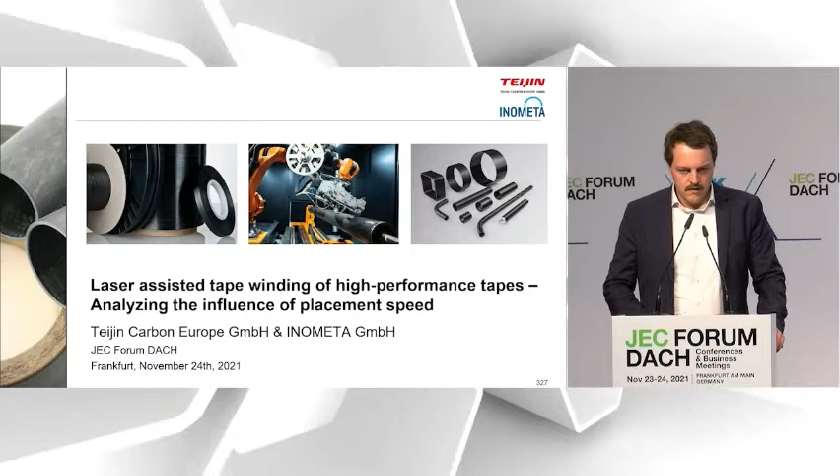We will first start with a quick company profile. I will start with the Teijin introduction, and Markus will take over with the introduction of Inometa. He will then move on with some motivation and partnership behind what we're doing, and describe the systematic approach we're following. I will then start over and show you some first results from our trials, give you some insights into what we evaluated, what we see, how we move on, and what's furthermore planned.

Teijin Carbon Europe is part of Teijin Limited, a Japanese group, globally over 170 companies with more than 21,000 employees worldwide. I'm based in the German facility of Teijin Carbon Europe in Wuppertal. We also have our production plant in Heinsberg near the Dutch border, and we are one of the largest carbon fiber producers worldwide and the largest short fiber producer.

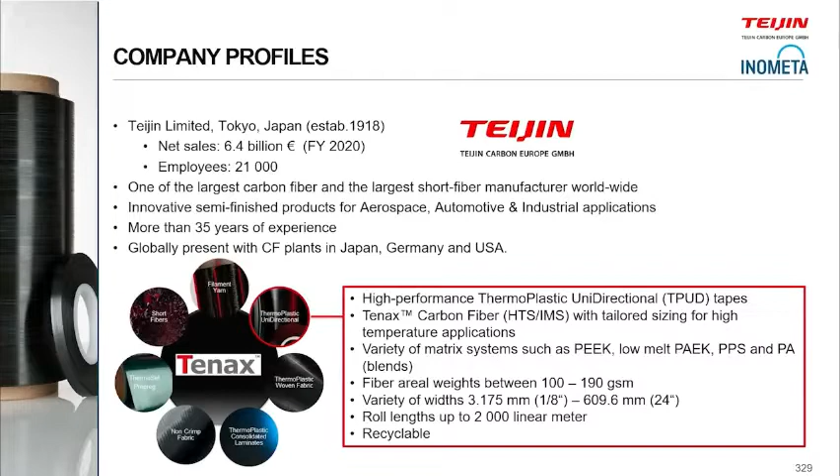On top of just carbon fiber production, we also have various semi-finished products in our portfolio for demanding aerospace, automotive, or industrial applications, such as NCF materials, thermoset prepregs, rapid cure systems, or thermoset prepregs based on rapid cure systems, but also our thermoplastic materials that are part of our evaluation.

What we call in Teijin language a TPUD, a thermoplastic unidirectional tape. In the portfolio we have several types based on high-performance thermoplastic materials: PEEK-based, Low-Melt PAEK, PPS, and also from the Japanese side some polyamide tapes.

The first three that were mentioned are part of our evaluation process. With our newest production line running since 2019, we are able to produce 24-inch wide tapes, but also the former standard with 12-inch, and everything down to slitted tapes is currently handled by external partners.

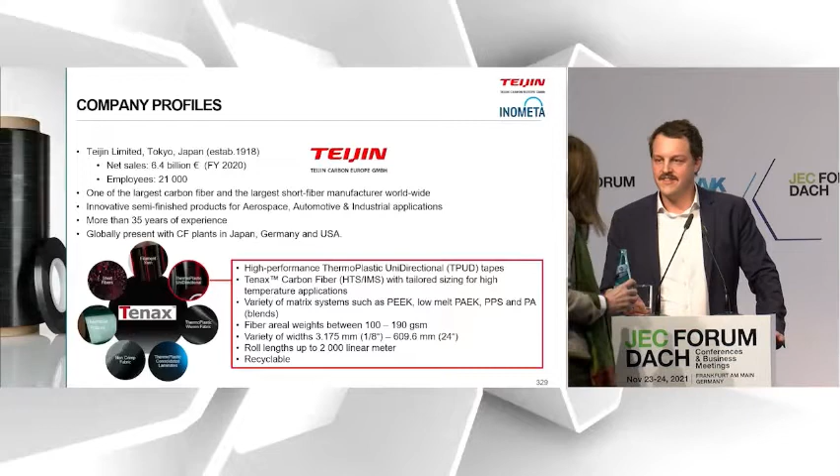The portfolio ranges fiber areal weights from 100 to 190 GSM. With the new production line, we're able to produce up to 2,000 meters, which can be sent directly to slitters, long defect-free raw materials that help automated processes as they are used within Inometa.

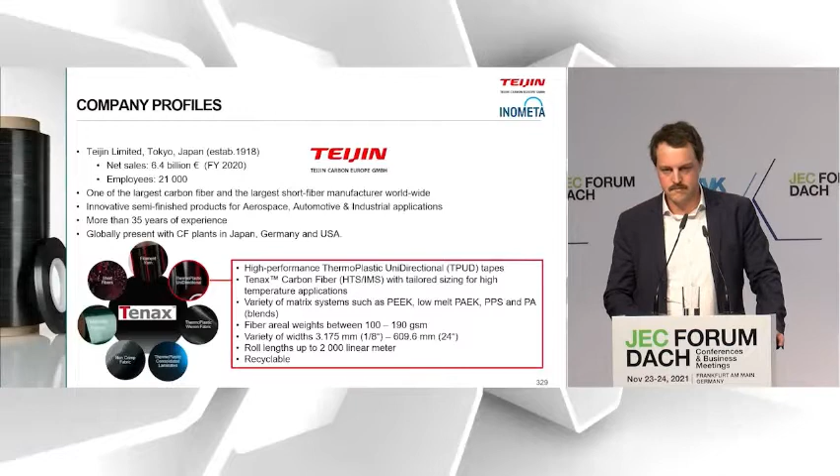Markus: Okay, so my name is Markus Hildebrandt. I'm with Inometa and the Avanco Group since 2017, and I'm responsible for the thermoplastic winding activities that we do at Inometa. Maybe just to give you a short introduction to the company, since I would say we're not that prominent on the composite market yet. We are located in Herford, Germany, have about 230 employees, and we've got a strong background in manufacturing high-end roller systems, which are made of aluminum and also of composites.

Thus we have quite a broad range of composite tubulars, which we produce in filament winding as well as in thermoplastic tape winding, and a lot of know-how when it comes to machining those parts or even coating those parts. Based on this roller business, we decided to invest into thermoplastic winding machinery, which was supplied by AFPT, also a company from Germany, in 2018.

We have, and will show this today, different product categories that we are talking about. We've got really thin wall shells, which can be used for rotor cans or rotor shells, for example. Here we are talking about really low amount of composite, but a large number of parts that have to be produced. On the other hand, there are other applications such as bearings, which have much higher wall thickness, thus more material per part.

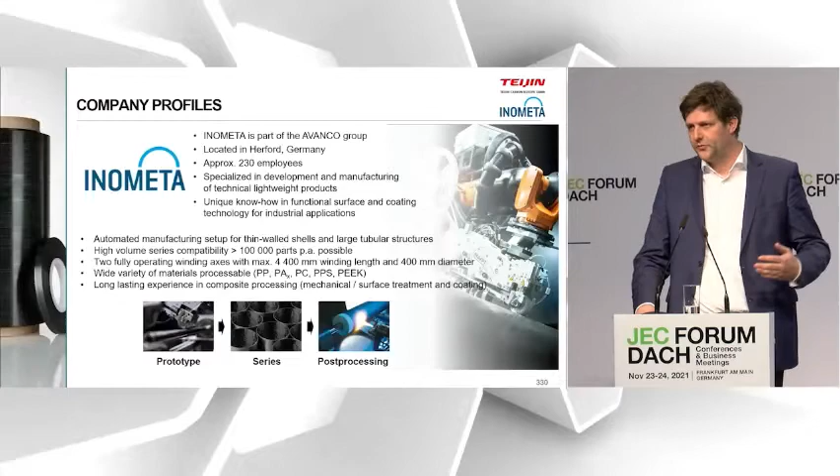So that's quite a wide range of materials and quite a range of geometries that we are looking at. I would say the typical diameter range is somewhere between 10 millimeters and 400 millimeters, and part lengths are between just a few millimeters to 4.4 meters in length, which we can do in thermoplastic winding.

Together with AFPT, we put quite some work into this in order to get this process a bit closer to industry. So we have two completely autonomous winding axes: one axis is always in the laser housing being wound on, while the other one can be equipped with the next mandrel, in order to get a higher degree of industrialization. In the end, Inometa is a producing company, so we are trying to produce series of parts, but we are also capable of doing design for composites as well as post-processing.

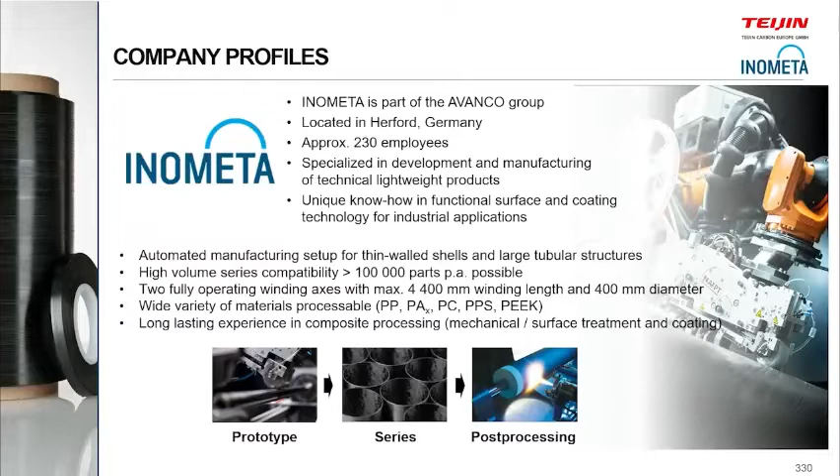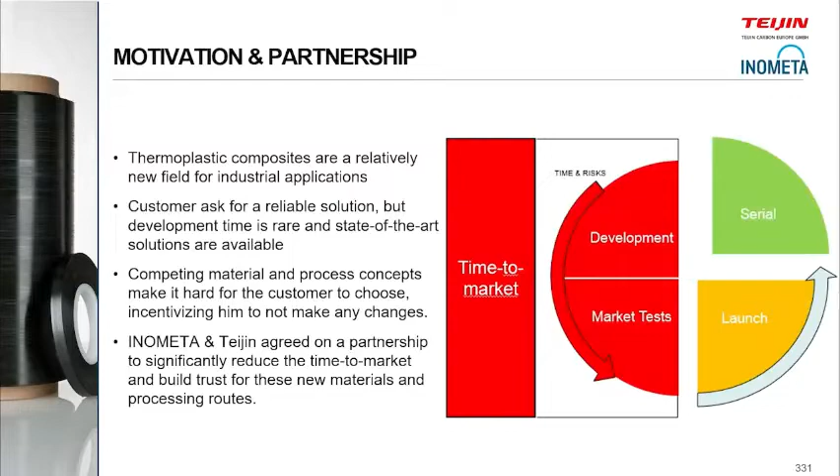So we partnered with Teijin together because, and this is what I will show within the next slides, we have always run into the same problems with customer projects, since thermoplastic composites are quite new. Injection molding composites are out there for a long time, but continuous fiber reinforced thermoplastic tapes, their properties, what can be done with them, what can't be done with them, is mostly unknown to the customer. The customer comes to us and he has a reliable solution, like a metallic solution or a thermoset solution, which oftentimes we are convinced that we can add additional benefits for those customers.

But there's still development work to be done. Some customers don't want this development work, or they don't have the time to do this. So we partnered with Teijin in order to get some of this development work done up front so that we can address the customer problems much faster and get into series production much faster.

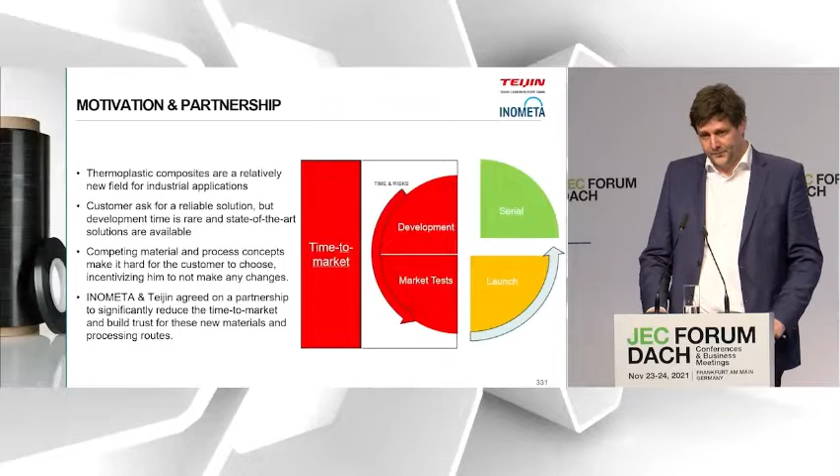So what have we done? We are in the middle of these trials, I would say. These are just some of the results that we are going to present today, but it's quite a simple approach. We took the Teijin materials that Pascal already explained what they are. We did winding trials. We changed different of the key parameters. Today we are talking about a bit of winding speed, but there's also different winding patterns which occur in different applications, so there are a lot of parameters to be handled.

We did just some on-site evaluation. So sometimes you can see this was not really a good setup, so we don't need to test the part. But when it comes to gaps within the laminate, overlaps in the laminate, that's something that normally we are doing together with the end customer for their application in order to get a really good set of robust process parameters for them.

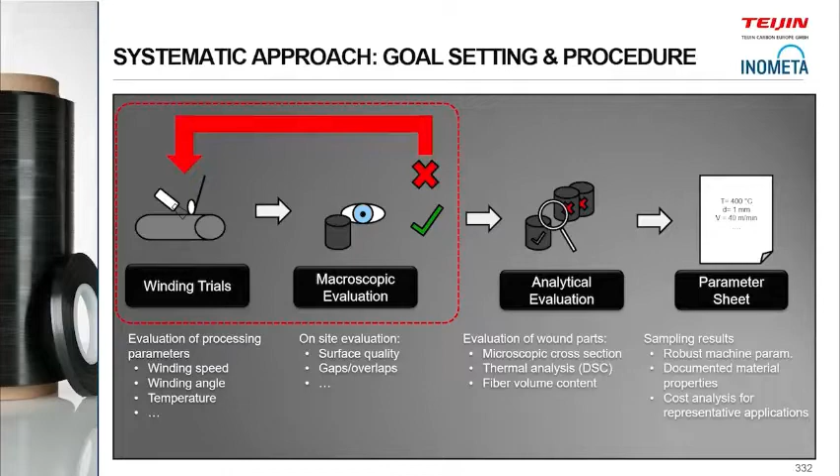Aim of this partnership was to get an idea, or as good an idea as possible, on what such a robust set of process parameters may look like in order to be quite fast in the development process, which is then customer specific. I was reminded a bit by the talk of Markus with the automated programming - that's exactly these things. There are different parameters which are different for each tape material, which are different for different geometries, and we just want to have a really robust base in order to choose these parameters, not make the end customer pay for our search for the right parameters.

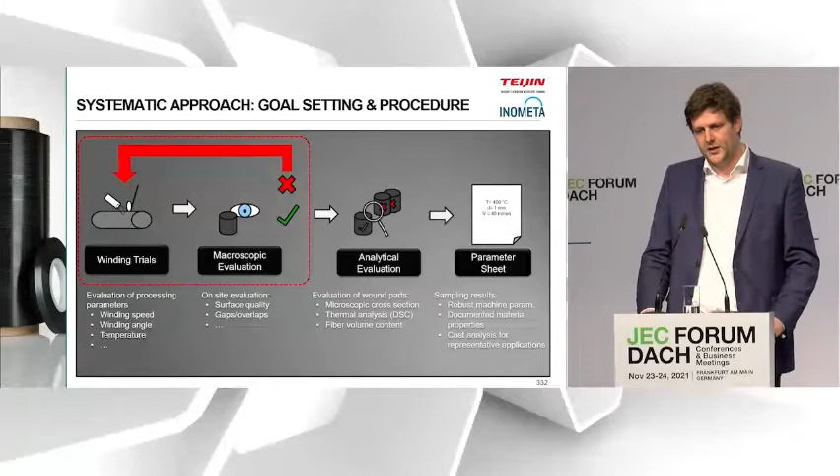And then in the second part, that's what Pascal will present. We did some analytical evaluation, so DSC, microscopic fiber volume content measurements, in order to get for the materials from Teijin such a parameter sheet, which we then can use, maybe slightly adapt to the customer's final parts, and then be quicker in the development process.

So maybe, to talk a bit about our experience which we had within the customer projects - I would say the perfect world scenario for such a customer project is that the customer sends to us a specification for their part, which is perfectly suitable for thermoplastic composites, so they exactly know if they want PPS, PEEK, PEI, PP, whatever. They know what kind of tolerances can be reached. They are aware of the mechanical data. They are aware of cost structures that are out there in thermoplastic winding. But to be honest, that never really happens.

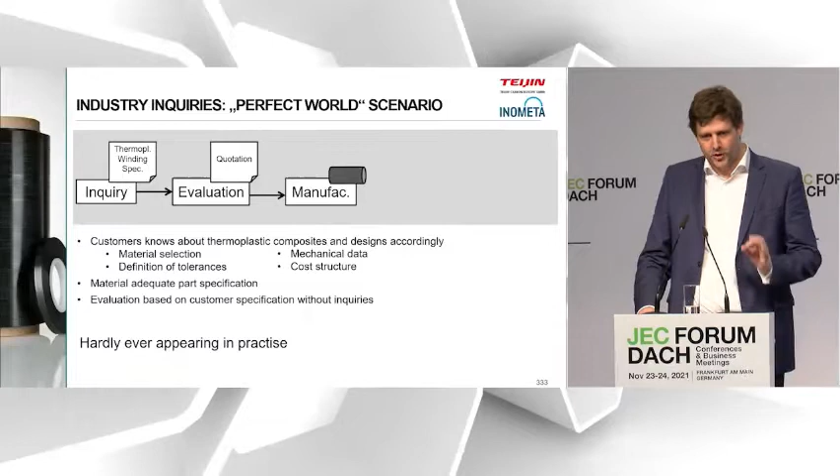So there are some projects out there where we are specifically asked for a carbon fiber PEEK bearing, for example, because this material is established for this one application, but 90% of the customer requests are not the thermoplastic winding specification that we get.

What do we get then? We get the customer specification, which is maybe from a metallic part, maybe from a thermoset part. So there are always the same questions arising when talking to the customers about thermal stability. TG in thermoset is another understanding than TG in thermoplastic materials. When dealing with thermoplastic materials, there's always the question about creep behavior, and the question on how good are the tapes that are supplied on the market - so how's the porosity of those tapes?

This leads to different applications where temperature is the driver, maybe corrosion resistance is the driver. Then sometimes the customer has a really narrow window on what angle he wants the fibers to be aligned in. Maybe this is technically possible, but then we have to work with really, really small tapes, narrow tapes, which then lets the production time go up and thus cost go up.

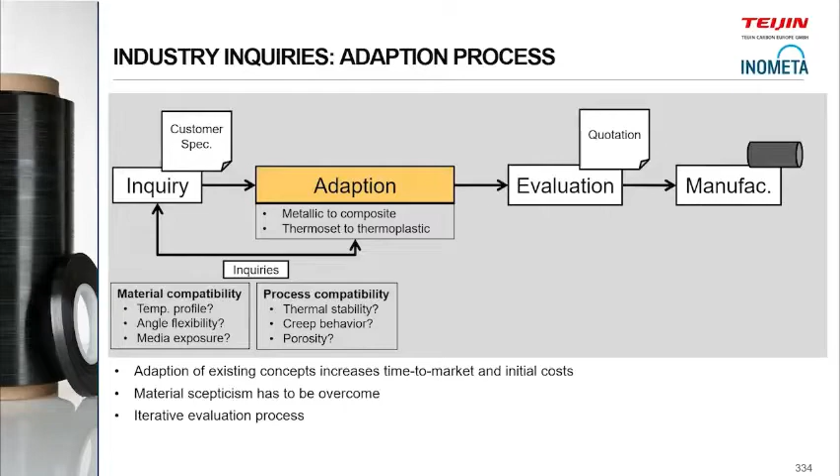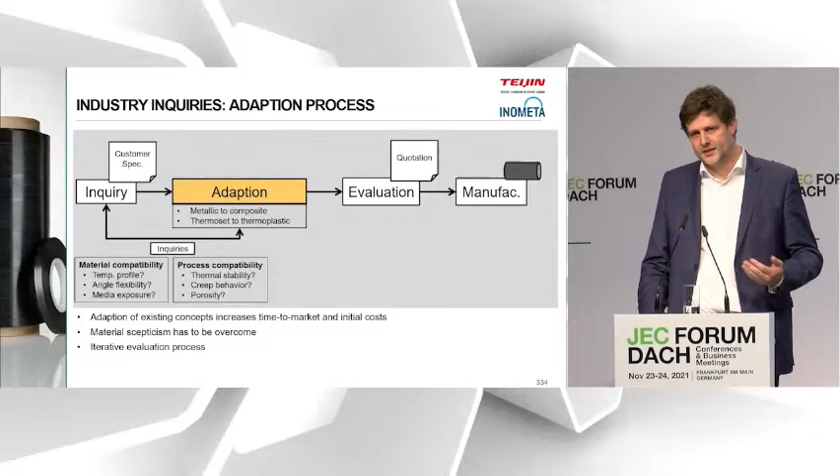So being able to give the customer an optimization on their customer specification, that's, I would say, the daily business with all of those customer requests we get. So it's quite an iterative process. This takes some time, this takes some trials. This is cost intensive for all parties.

So what we are aiming at together with Teijin is how can we shorten this adaptation process. I think thermoplastic composites are not established in so many industries, so we can't get rid of this adaptation process, but we can try to optimize this adaptation process.

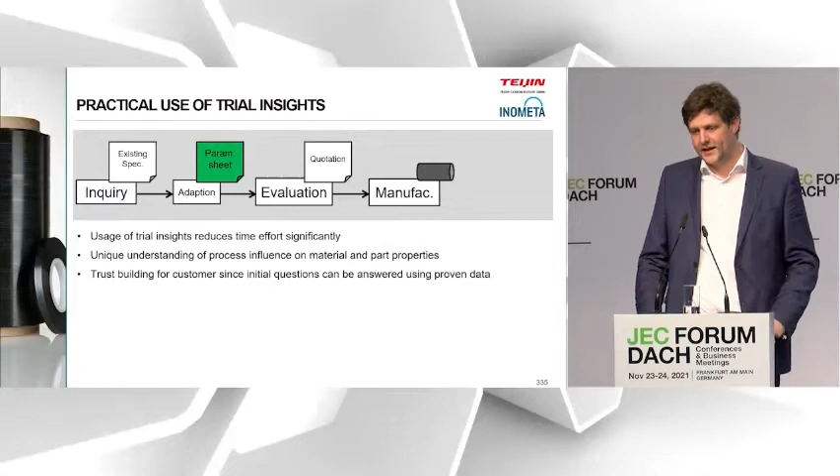And we want to use exactly this parameter sheet, which we are working on right now for the Teijin materials, in order to offer a unique understanding on how does this tape change through our thermoplastic winding process, and give those data to the customer, build trust with the customer in this new material class in order to get more wound thermoplastic applications out there in the market.

So from here on, Pascal will take over and will present some of the results that we did with the PEEK material from Teijin.

Yeah, thank you, Markus, for the quick introduction. What's the background of our work? I want to give you some insights of some first tries, so it's not all we did. So just the first review, let's say, how the iterative processing looks like, what we do.

So here, the first results I will show you are based on one material option. It's a PEEK-based tape with an HTS fiber, so a high tenacity fiber. We also looked into low-melt PAEK material and PPS. That's still in the evaluation, and we have some other trials planned.

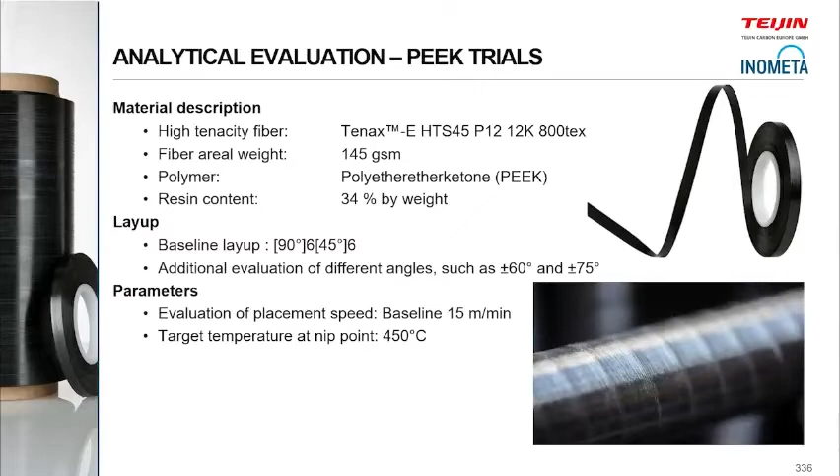The baseline, or the baseline part, the winded part, uses always the same layup. So it's 12 layers - first 90-degree layers, and then plus minus 45 around. But nevertheless, we also performed additional tries to see the effect if we change the winding angles, how it affects the gaps or voids between different layers. So that's all taken into account, and the trials are still running on that focus.

First baseline was 15 meters per minute where we started. And on the next slide, I would like to show you when we do microscopic evaluation as a quick first insight to see how the consolidation quality is.

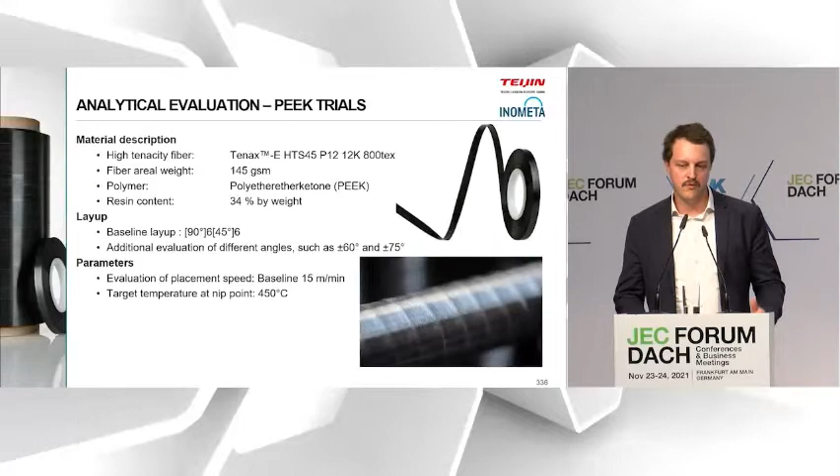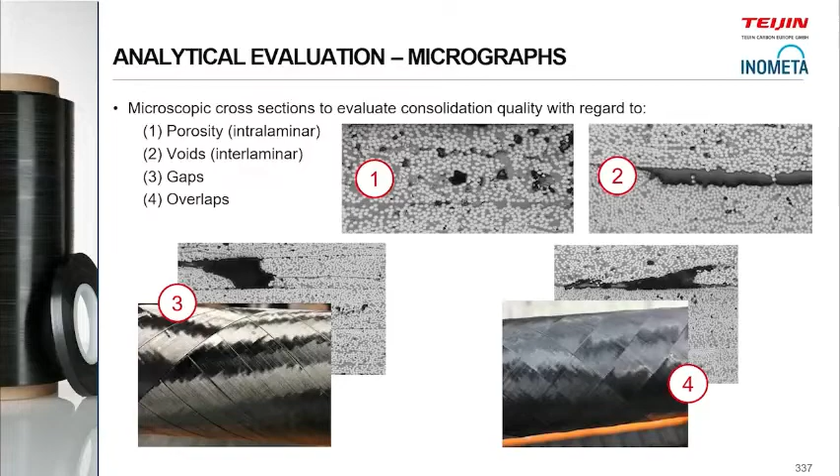First, an example of what we do not want to see in the tape, but with the quick cross sections we perform, we easily can get a quick feedback on some defects we clearly do not want to see in the material, such as porosity or voids between different layers, and as well, if you look below, gaps or overlaps, which then result as well in voids in the material, which clearly decrease the mechanical performance of the final application.

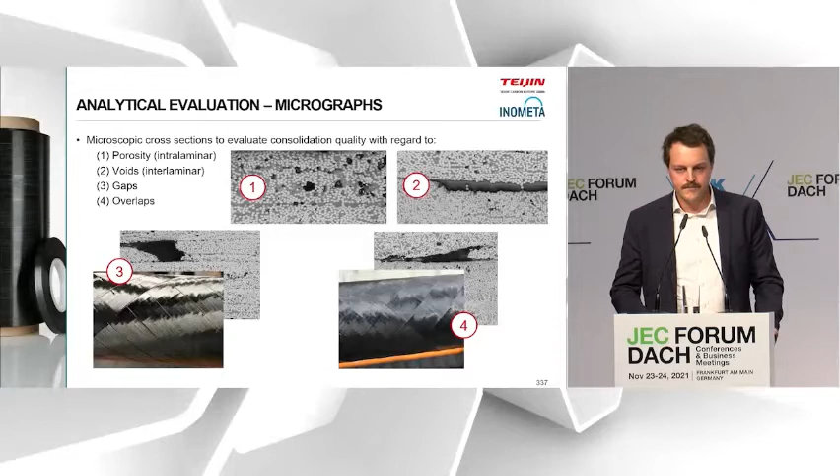So we did some trials and looked how the consolidation quality decreased or improved with different setups. So as I mentioned, we started with the 15 meters and then added for every trial another 5 meters per minute. So what you see here is the plus minus 45 that are the outer layers of the part. The plus minus 90 are in the middle. Below there is then the heated spindle that we use for the winding trials.

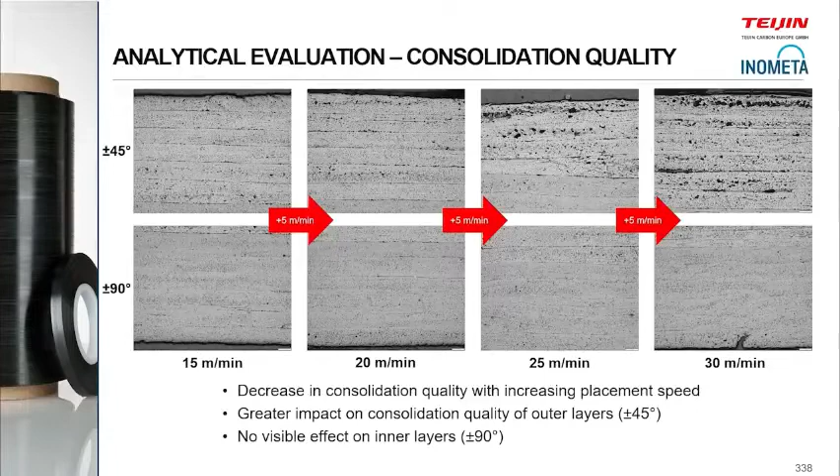And you clearly see, if you look into the plus minus 45, for example, with the increasing speed, you clearly see a decrease in consolidation quality. But for instance, on the more inner layers, you do not see that effect as drastically as you see on the top layers. It's basically just due to the fact that these material layers see, with every layer we put on, a completely different thermal history than the outer layers.

Therefore we need to find a process window where we can achieve the best consolidation quality for each type of material. So we started that iterative process to quickly evaluate and take the measures and changes on the trials that we are running.

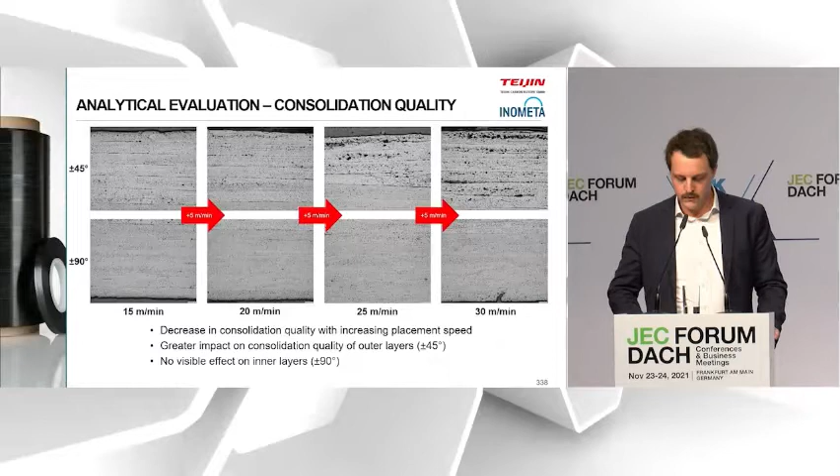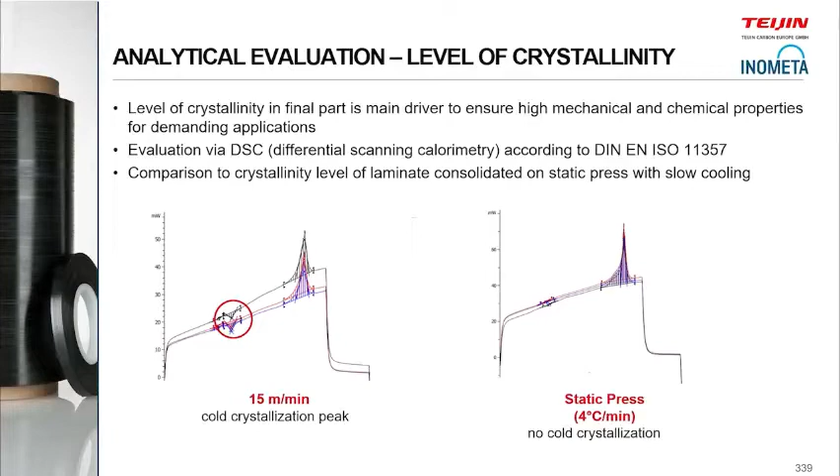What's also really important is due to the fact we use semi-crystalline polymers, we want to use that benefit and have the highest crystallinity possible in the parts to get the highest mechanical performance as well as the chemical properties, which rely on the crystallinity level in the final part, in the application, to increase properties such as strength, stiffness, and resistance against aggressive fluids. If you look into oil and gas applications or aerospace, like influence of potential oils, de-icing fluids, whatsoever, the high crystallinity level is really important.

What we did is for all the trials we did separate runs of DSC analysis. Not sure how familiar you are with that sort of analysis, but basically it's a thermal analysis method where you compare a reference sample with the actual sample from the part and get good feedback on the thermal history the part saw. Then you can see different effects such as the melting, what you see on the right side, the high peak, or glass transition temperatures.

As well, what we see on the left side when we look at the 15 meter per minute winding speed, we have a cold crystallization peak. That means on the winded samples we produced, we did not achieve the same high crystallinity level when compared to what we have on the right side, the curve from a static press panel. So we compared it to all the background we have with qualification work based on flat panels and coupon testing, and there we do not have such a cold crystallization peak.

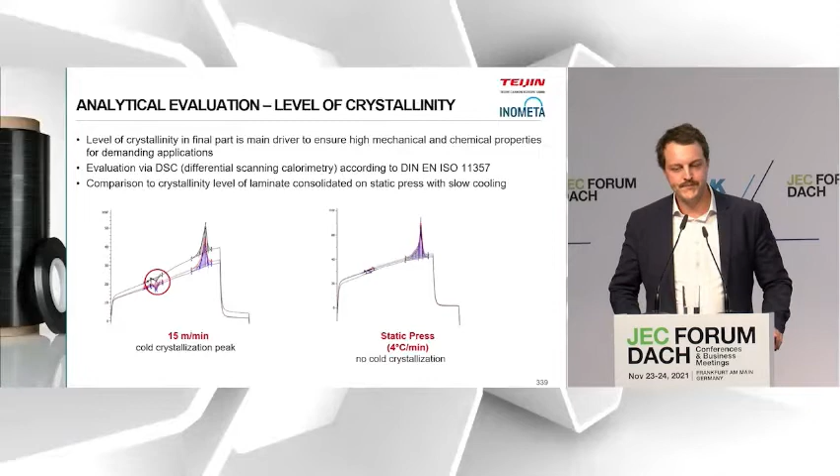And if we increase the speed even more, we see a decrease in the final crystallization level. But nevertheless, it's not on the level where we want to be, because we want to have the best possible mechanical properties and find the right setting for each material option. Therefore, now we are also looking into other speeds and adjusting based on the polymers used in the different tapes.

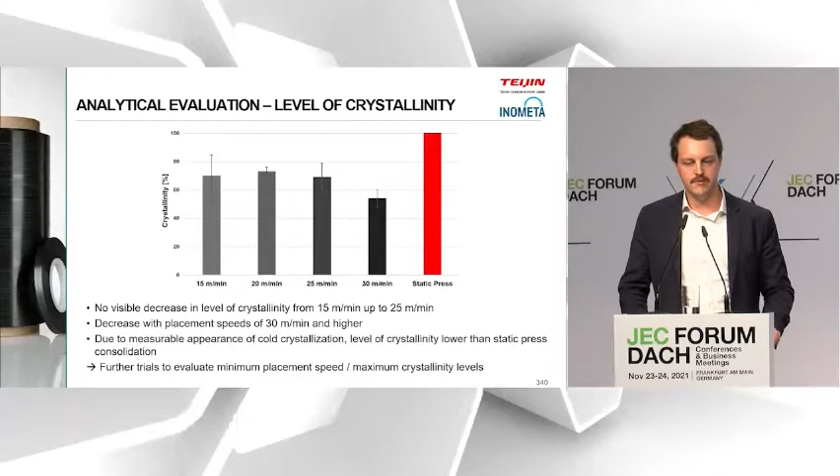As a quick summary, what were the benefits out of the work and the ongoing work we do? We get a better understanding from the material side and from the processing side, combined to find a robust process which helps producing the best part quality based on the various customer requests, and also taking into account the economic values, if we find an improved processing speed with regard to the automated processing route.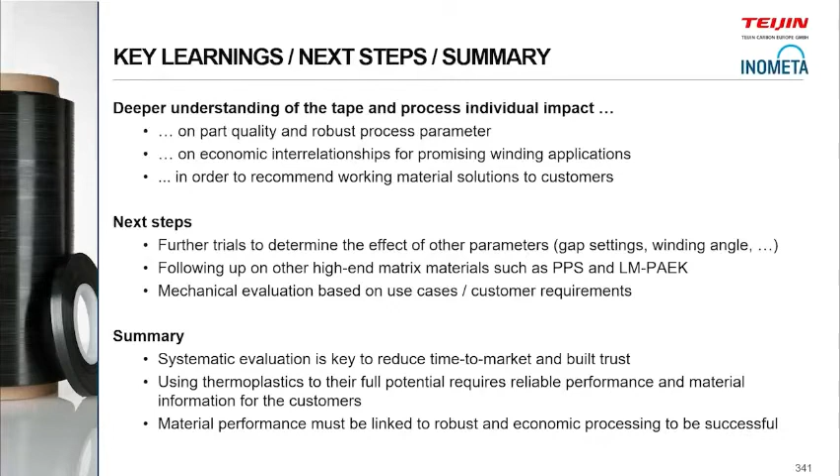After that, based on the specific customer requirements, we also need to find a way to do a mechanical evaluation. With the insights we get from just the visual inspection and the DSC measurements, we can make some assumptions based on what we did with coupon testing, but nevertheless, we need to do part testing for specific mechanical properties to meet the specific customer requirements.

To summarize, I think collaboration as we do from material supplier and the part producer is key to find the best possible setup to reduce development times for customer requests, and also build trust for customers who are new in the field of thermoplastic materials, because not all have the thermoplastic background and try to change from, for example, thermoset materials to thermoplastic applications. Therefore, I think that's really the baseline to offer the best solution for the final customer.

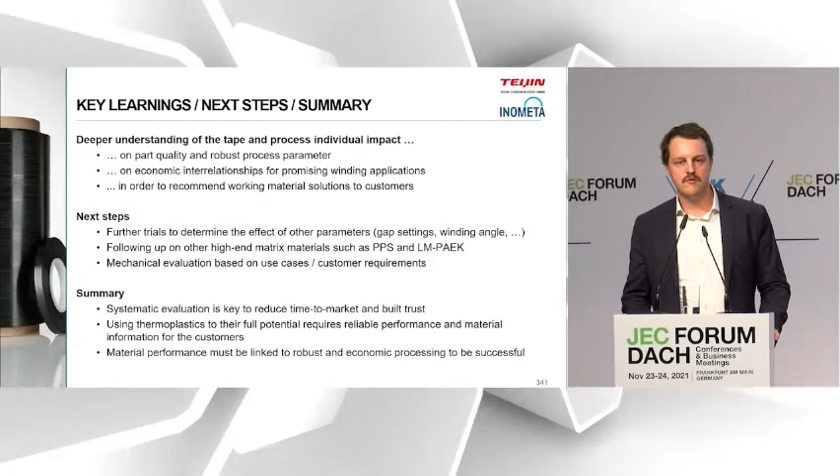That's basically it. I would also like to thank Markus and the team at Inometa for the work so far, and the colleagues in Teijin that are not here. Thank you very much for your attention.